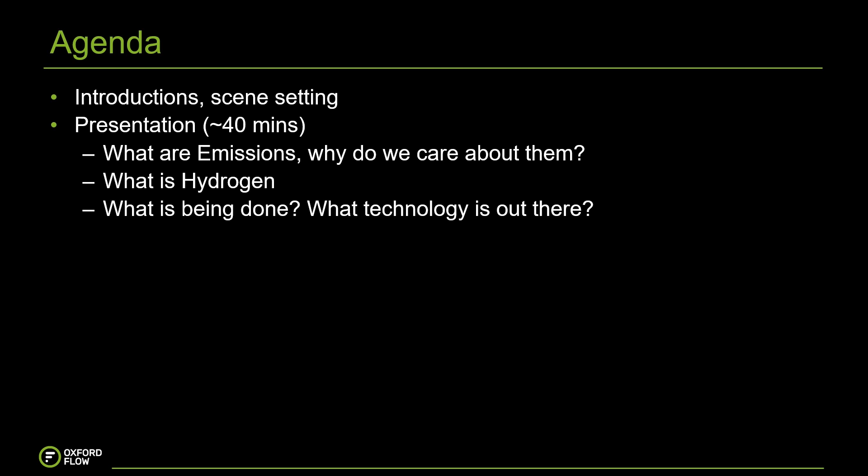So, without further ado, I'll move on. We'll start off with a few introductions. So, first of all, our hosts, who are Oxford Flow?

Oxford Flow are a manufacturer of flow control and pressure control devices, spun out of Oxford University in 2015. Since then, we have done a huge amount of work throughout the world in a lot of different industries. We started out in water distribution, sorting out a lot of problems for UK water companies.

Those of you who are based in the UK and have read the news recently know that the UK's largest water supplier, Thames Water, is running into some issues with its own debt, but I'm not going to get into that.

We started out in water, but now work in energy systems, gas transmission, energy transmission, and upstream oil and gas as well. But we are very heavily getting involved with the hydrogen side of things as well, going forward. As I say, Oxford Flow has been around since 2015.

It spun out of Oxford University. The founder of the company is this man over here, Professor Tom Povey. He came up with this revolutionary design of pressure regulator because he threw out the rule book for how you should design a pressure regulator or control valve and came up with his own design.

Now this range has extended from this first item that you see over here on the right to a rather large range of pressure and flow control devices, along with some accessories that are proven and ready for the energy transition. So we start off...

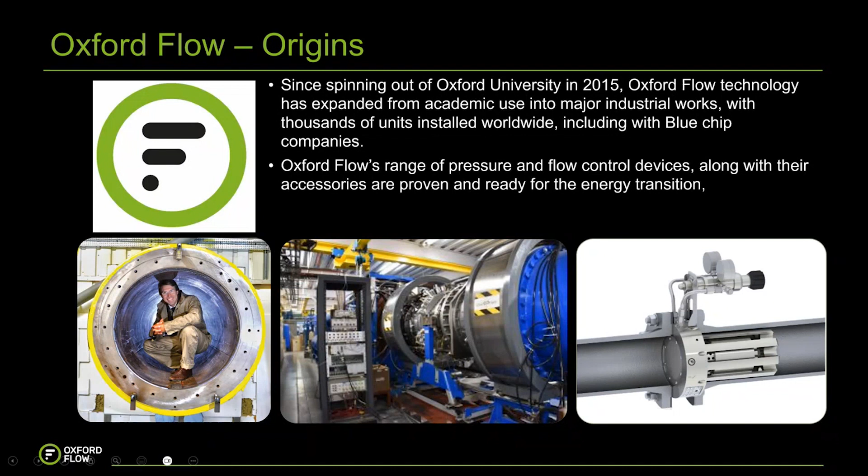...with a little bit of a product overview as well, a little bit of background to what Oxford Flow does. We've got three major product lines: the ES series axial control and isolation valves, the IM series of gas regulators, and the IP series of liquid regulators used for water, oil, or any other process fluid. All of these products have auxiliary products and variants, so I won't go too far into the details - these are all on our website, which will be shown later in the presentation.

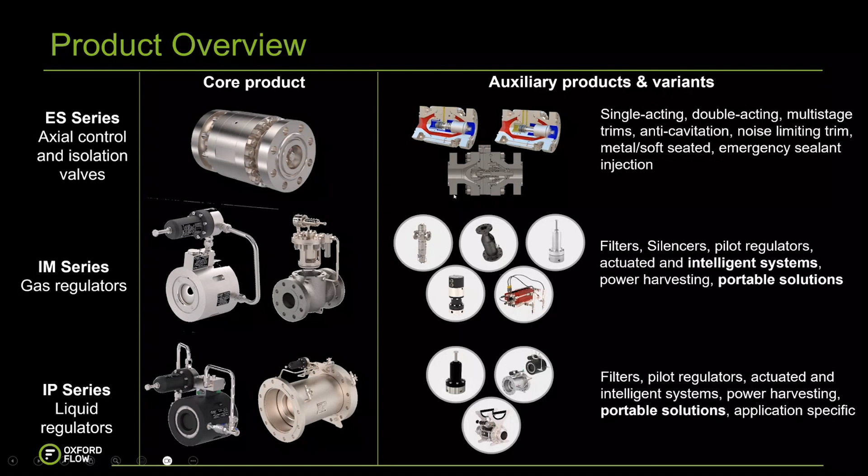So, what is going on? Why is everyone here, why is everyone tuned into this webinar today? I'll start off with a few questions and then the answers going forward. First of all, what has happened? Traditional forms of energy are running out - oil and gas reserves, fossil fuels are running out. That is a fact. There may be a lot left, but they will run out at some point. And the extraction and processing of that fuel is causing and has caused irreparable damage to the planet.

And the UK - this came out, I think, yesterday - is currently missing all of its targets, according to the Climate Change Committee. So, lots of things have to change in order for the world to carry on in a healthy and sustainable way.

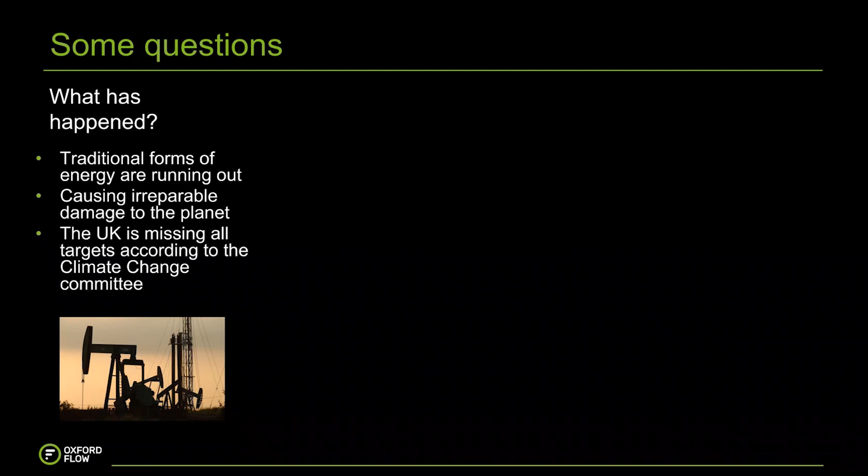So what really caused this to happen? Coming from a very innovative flow control and pressure regulation manufacturer, there really has been a lack of innovation for a very long time, a real lack of will to perform step changes in designs and operations. So that's kind of what's happened - there's yes to innovation, but no to change, and the two can't really go hand in hand.

We, as an entire planet, as an entire population, have formed a very heavy reliance on fossil fuels as well. So here we are, and we can't just stop the taps. That just can't happen for lots and lots of reasons, and no one, especially us, is saying that we should.

But there are also world events - I've shown a picture of the Russia-Ukraine war currently going on that has seriously affected energy supplies all over the world. Much more than that, but I won't get into the politics of that today.

So what does all of this mean? If nothing is done, I think it's very obvious: if we carry on the way we are, there will be serious and long-lasting consequences. But it is up to us. It's this generation that has to do something about this situation. All the change has to come from today, from now.

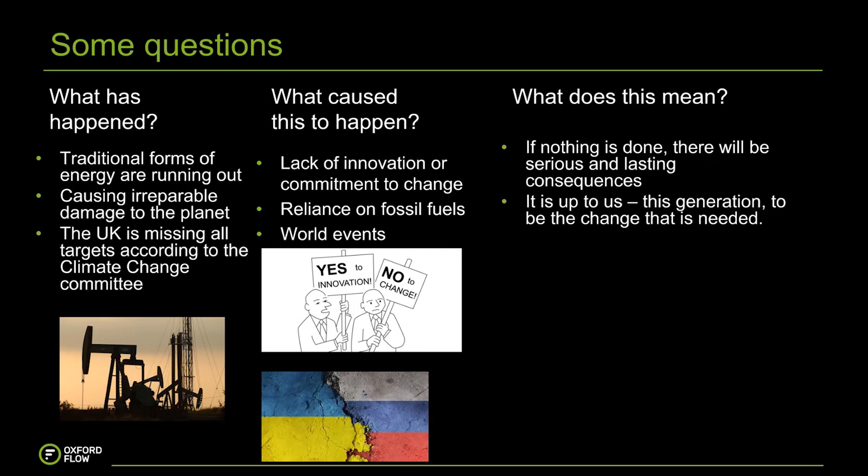So going on, what is actually being done now? I've listed some items here: emissions reduction policies, net zero policies, carbon offsetting, but more importantly, research into alternative fuels, alternative transport, shipping, food, investment. There is a huge amount of investment going into low carbon technologies and renewables, but then also just spreading the word in conferences and exhibitions.

So that's all a lot of money, and it's a lot of talk. I just had a quick Google of conferences and exhibitions around renewables and hydrogen, and you just cannot breathe for hydrogen conferences and hydrogen technology shows and renewables like that. So things are happening, but conferences and exhibitions are one thing, and going ahead with a transition is another.

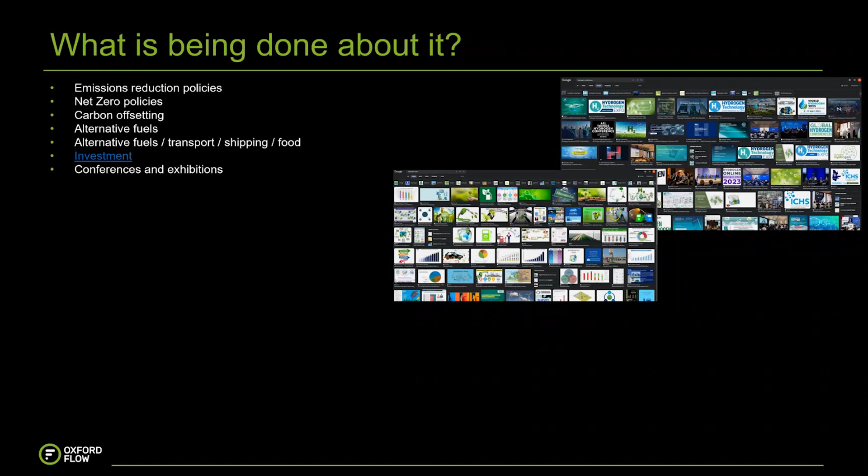But that said, I've said we can't just turn off the taps for oil and gas and fossil fuels, because they do contribute a lot to our day-to-day power and electricity.

And this is a forecast from TotalEnergies - all references will be available later on. This is showing the kind of requirements in 2050 for oil and gas, so fossil fuels. And they've not really reduced that much. In fact, they've grown as a proportion of the entire energy mix.

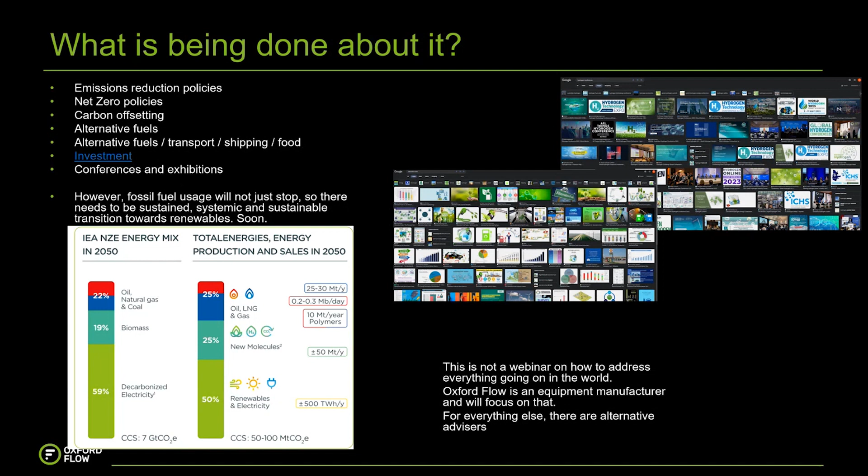Oxford Flow is an equipment manufacturer, and we will focus on the differences that Oxford Flow can make. For everything else, there are alternative advisors available. I don't have the contact details, but there we are.

So let's kind of bring this into focus now. We are focusing on emissions, hydrogen, and general renewable tech. That's not to take focus away from any one of those three. And I'll be very clear in that there is no silver bullet to any of these issues. Doing one, solving the emissions crisis will not solve the rest of the energy crisis or anything like that.

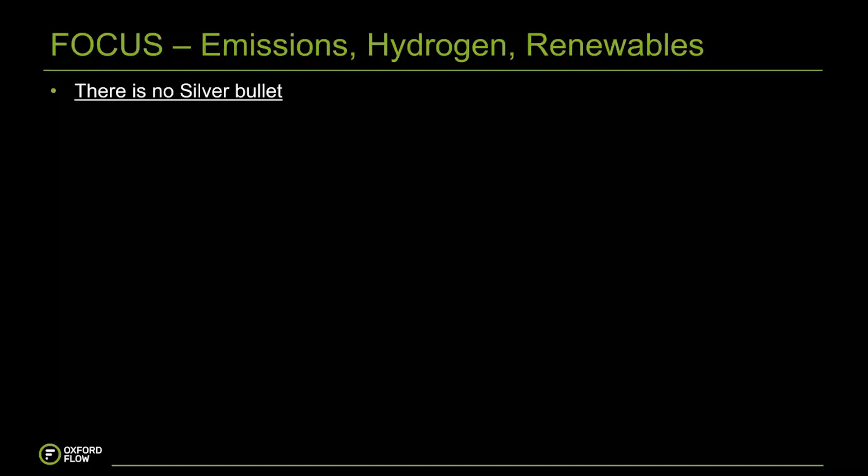However, there are solutions around, products and technologies that will make that collective effort easier through, first of all, marginal gains. Reducing emissions step by step or cutting them away entirely will make the transition away from fossil fuels over to hydrogen, to renewables, to anything else quite a lot easier.

But as I said before, it is a collective effort. Not just equipment manufacturers will have to get involved here. It is governments, it is users, it's consumers, it's other producers as well. So team effort, but it's going to take a lot of effort. But marginal gains and step changes are the little ways forward.

So we'll focus on the emissions and hydrogen and renewables, but also on the products, those solutions and where they can fit to make the systems where Oxford Flow fits in - petrochemical, energy, utility systems - where they fit into the net zero age, and how can we carry on with those? How can we make them fit for purpose going forwards?

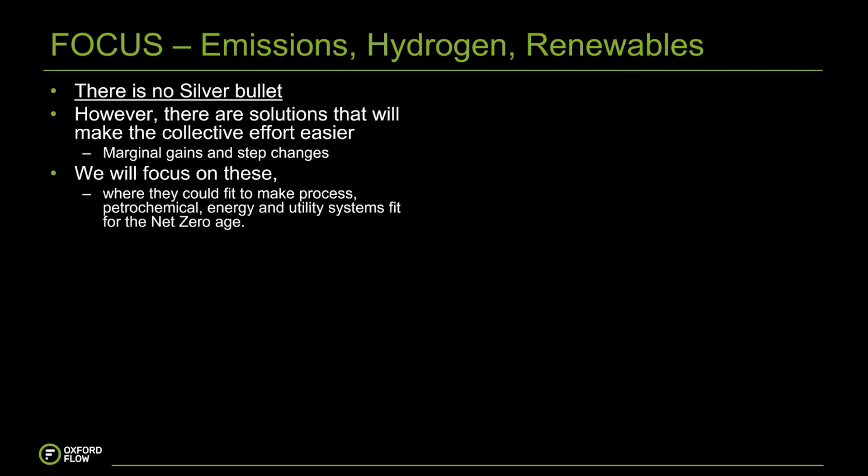So, as I say, we have a line of products that are available that we want to make sure people are aware of, because they can help with all three of these major points: emissions, hydrogen, and renewables. So we've obviously gone through the core product line, but we've also got cutaways here, just exactly what we're doing, which is so different to what anyone else is doing, especially in pressure regulation and isolation and control valves as well.

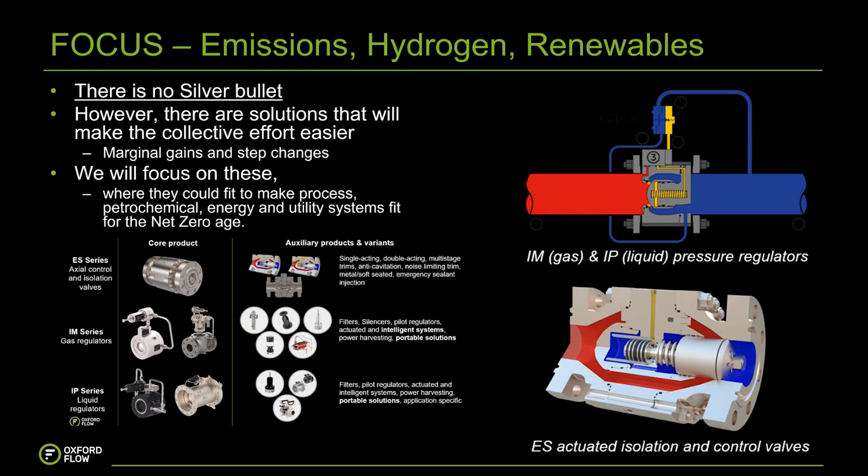So just breaking down those first 3 points, we start off with emissions. Why are emissions important? And first of all, what are emissions? I'm sure I'm preaching to the choir here. There's a lot of people who want to know the answers straight away, but there are also probably people on this call who are very new to this as well. So forgive me if I start from the beginning.

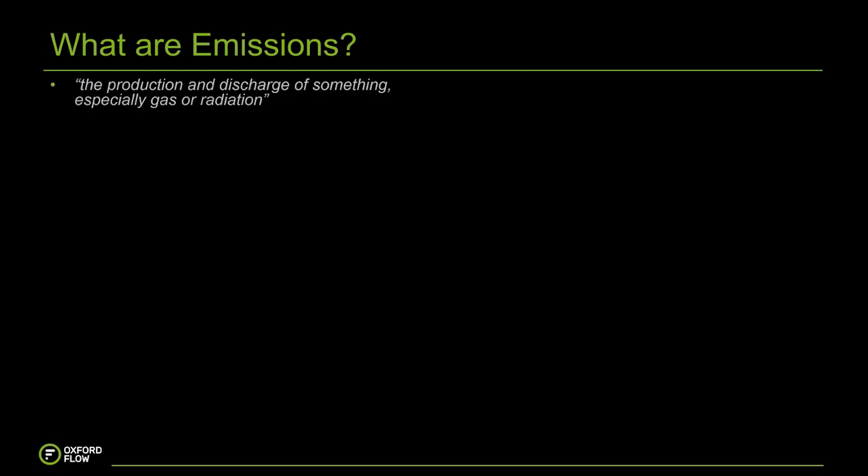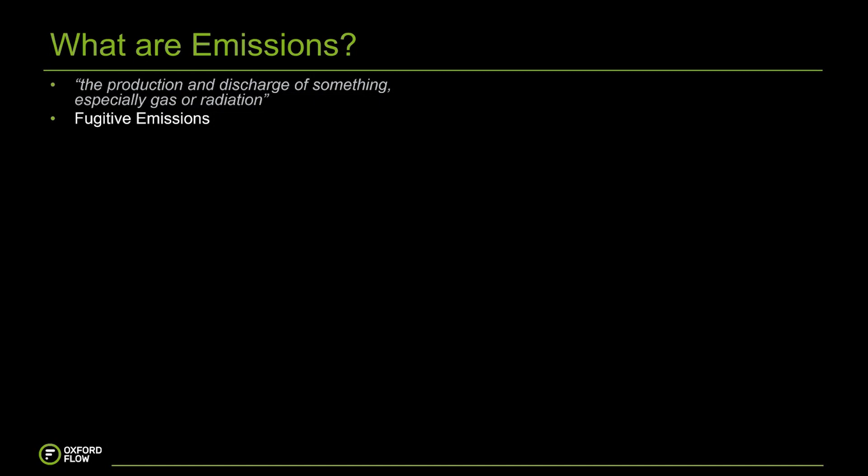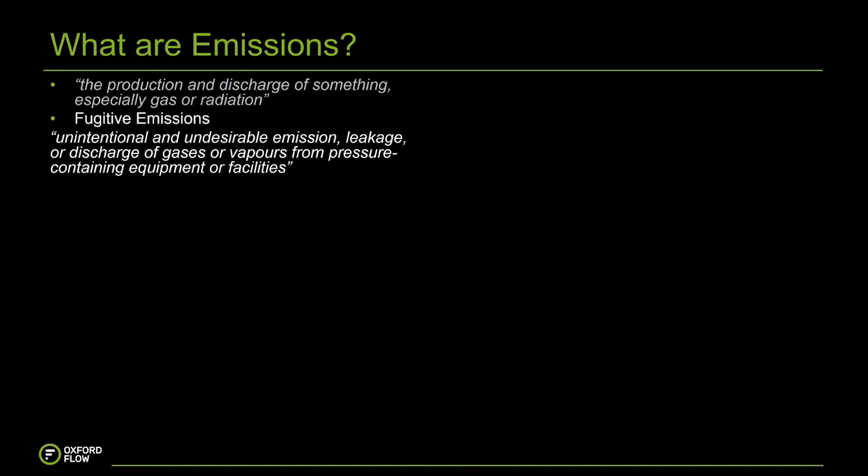So what are emissions? Production and discharge of something, especially gas or radiation. That is very broad. Specifically what we are talking about today is fugitive emissions, which has a slightly different definition. Emissions in general can be applied to anything, from cars to a leak of water out of the utility system. But fugitive emissions is very particular to process industries, defined as the unintentional and undesirable emission, leakage, or discharge of gases or vapors from pressure-containing equipment or facilities. That's very topical to what we do here at Oxford Flow, producing pressure-containing equipment that goes into process and utility facilities.

One of the main things we found the other day, this came out in April of 2023, is that the US oil and gas industry is emitting 70% more methane than the Environmental Protection Agency estimated previously. So that is a reasonably worrying estimate.

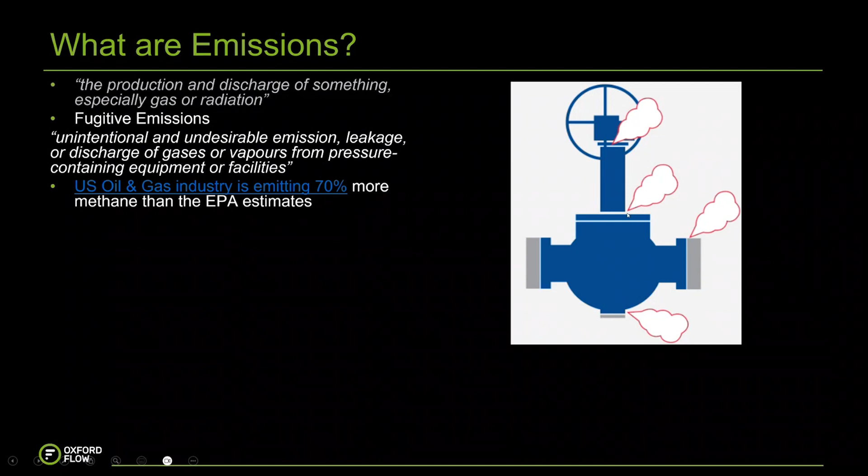I've got an image here of a standard control valve, a common or garden control valve, showing where common fugitive emissions come from. You'll notice this vertical item here, that's where there are two forms of emissions, and that comes from an Environmental Protection Agency report listing all of the pieces of equipment within a typical facility. There's a wider report linked here which you can all read yourselves, covering pumps, valves, connectors, lines, relief valves, average controlled and uncontrolled emissions in tons per year.

62% of emissions come from valves, so that is pretty telling in itself. Obviously joints are a major point as well, at 31%, and that is really telling. But of those valves, 80% of that 62% - I'll leave you to do that maths on your own - comes from the stems of the valve.

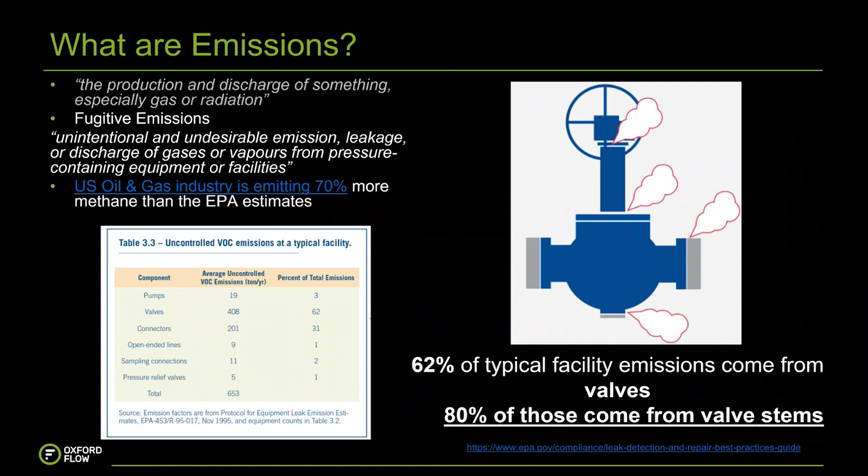So this vertical component here, which slides up and down, or radially for a ball valve or anything like that, that is where most emissions come from, which is really very telling. What does that actually lead to within these systems, within valves especially?

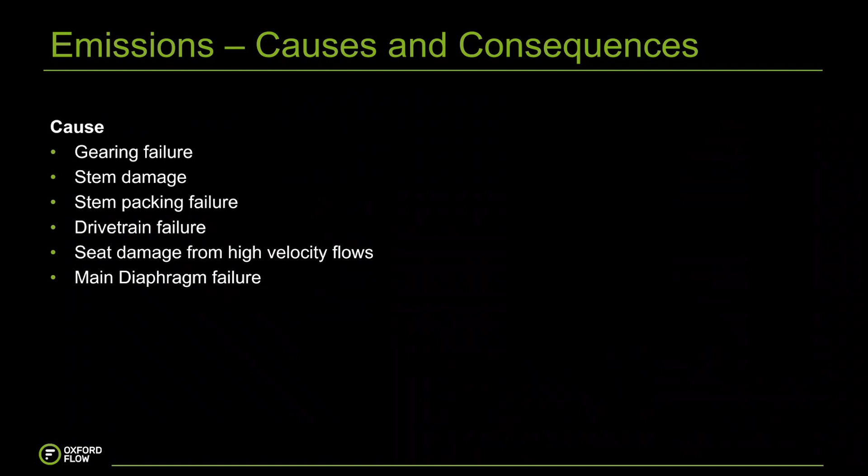So what do we do about all of this? This is a major issue because every time a valve loses control and needs maintenance, technicians have to come and maintain it. That requires the venting of a line, or a shutdown of some section to maintain the valve itself, which all requires venting of gas or fluid within the line. So how do we get around that? How do we stop the valves from failing, and as a result reduce that maintenance activity? Granted, some people have to do yearly or 6-monthly maintenance depending on the process industry or conditions, but how do we minimize that, minimize those failures, and ultimately reduce fugitive emissions?

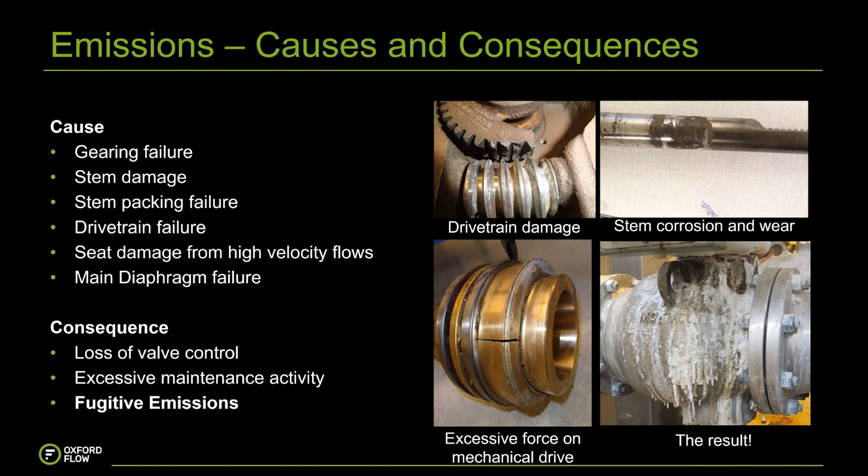The most simple and route one solution is to eliminate causes. So Oxford Flow have our own ES series axial flow control and isolation valve. This is an isolation control valve that is emissions free by design. Going back to that EPA report saying 80% of the leaks that come from valves come from the valve stem, the way to get rid of those 80% of leaks is to remove the stem entirely, and that's what we've done here. We've removed any sort of dynamic seal interface to atmosphere.

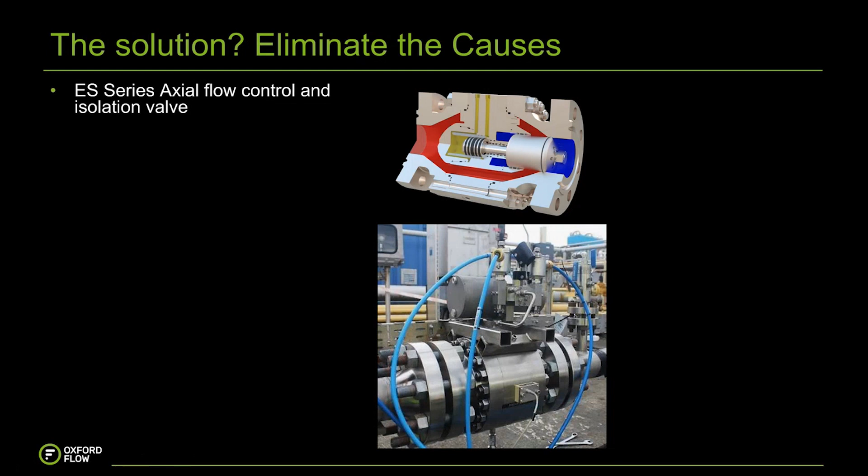There's no stem, it's just hydraulic lines. We've essentially moved that stem into the valve itself, where there is very little chance of process fluid leaking to atmosphere or hydraulic fluid leaking into the process fluid.

We also have our IM range of gas pressure regulators. These are commonly used in gas transmission and distribution purposes, but also lots of different process industries, tank blanketing, and also hydrogen as well, which I'll come on to later.

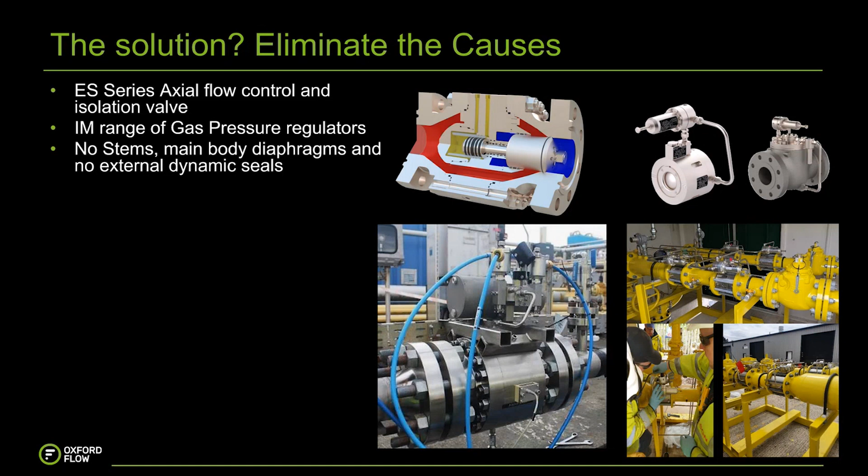The main point of all of these products is that the whole assemblies have no stems, no main body diaphragms, and therefore no external dynamic seals, which is very important. It's what differentiates us from almost everyone else on the market.

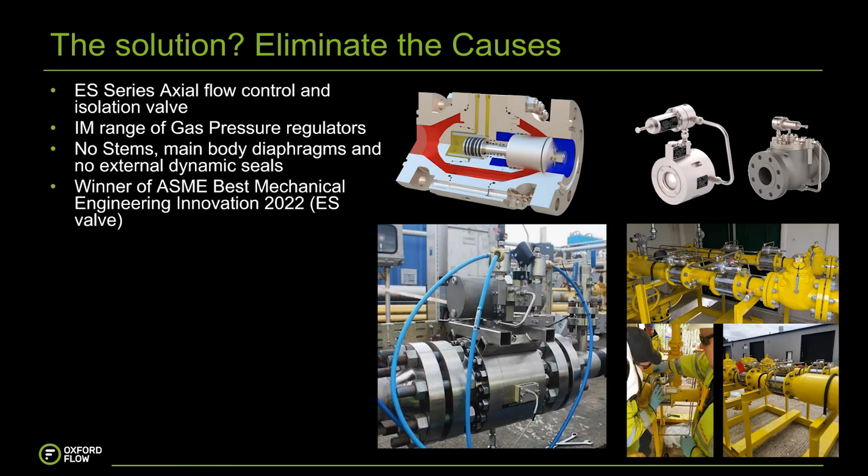I will say as well that the ES valve in 2022 was the winner of the ASME Best Mechanical Engineering Innovation Award at OTC last year. That is a really powerful award, because the reason this valve won was because of the inherent emissions reduction in this valve design, which is a game changer.

So we've talked about this. Actually, it's quite a simple thing for a lot of people to fix - just use emissions-free equipment. These aren't just designs, they have been installed, they have been working, and they have been shown according to the ISO fugitive emissions 15848 standard for control valves, that especially the ES valve, is emissions-free by design.

That has been tested as such. It's achieved the highest rating possible by a very high margin when tested with helium, which is the smallest molecule, the smallest element that anyone can test with, because even though hydrogen is H1, one single proton, it always exists as H2, which means its molecule size is slightly larger. So testing with helium and proving that we are the most resistant and emissions-free for that control valve is incredibly powerful.

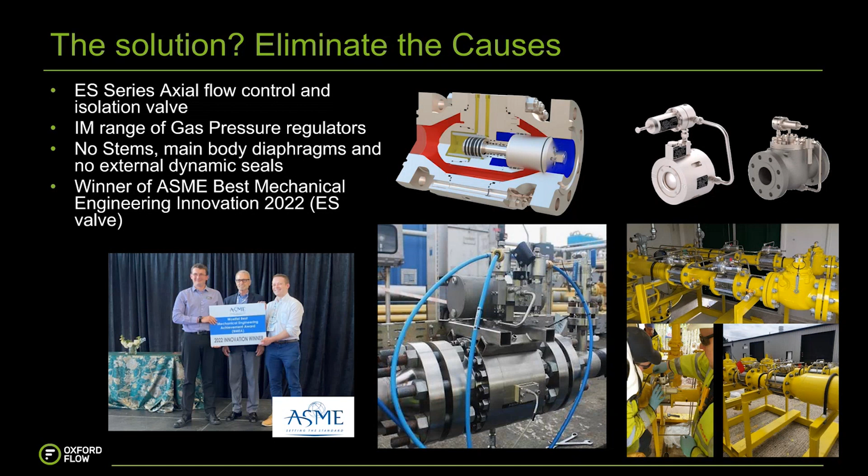But let's talk about hydrogen. I'm sure a lot of you are very familiar with hydrogen, but for the benefit of those who aren't and have just joined this webinar, I'll give you a very brief overview of hydrogen as a fuel, as an element, and why it is relevant today.

The reason everyone is talking about hydrogen is that it is a clean alternative to methane, natural gas. Hydrogen has been talked about as a fuel for a very long time, and it has been around as a feedstock, fuel, and chemical in process and paint production in many other industries for many years. But only recently has it been thought of as a clean fuel for the rest of the world to use - residences, commercial housing, industrial consumers.

This is the time that now hydrogen is being looked at, because it is estimated to contribute 75% of the mass of the universe. It is one of the most abundant elements that there is.

Also, burning hydrogen produces no carbon dioxide. Burning natural gas, oil, other fossil fuels, petrol, diesel, all release carbon dioxide and other nasty emissions. So releasing those into the atmosphere isn't the greatest thing, but hydrogen, when you burn it, releases no carbon dioxide - it's a clean burning fuel. Even releasing hydrogen into the atmosphere itself has no greenhouse effect, so if you do have leaks, it's not going to contribute very heavily towards global temperature rises and climate change, so far as we know anyway, as far as I know.

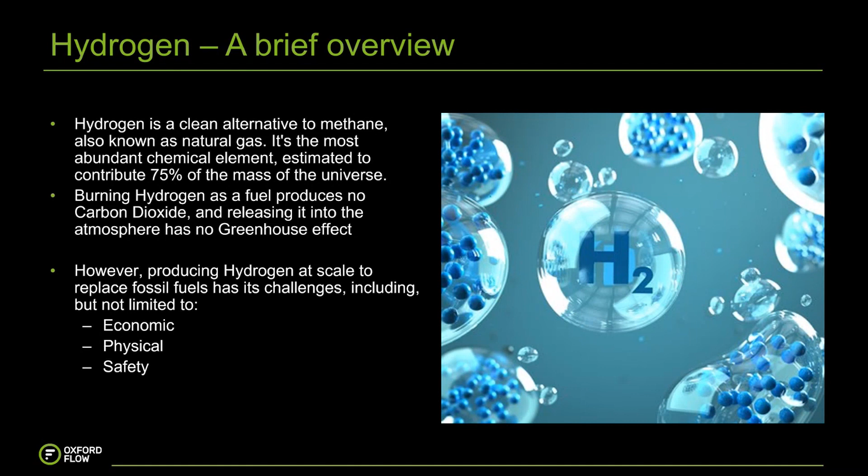So I'll come on to those slightly later on, but I'll just remind everyone that it is still Pride Month for another couple of days or until tomorrow. So I thought it may be quite an interesting one to take you through the hydrogen rainbow.

So to give you some background into this, hydrogen production is changed, and the type of hydrogen, how it's produced, is divided into different colours. Actually, a lot of them don't correspond with the actual colours of the rainbow, but it's called the hydrogen rainbow because there are so many colours available. But I'll start off with what is currently the most abundant form of hydrogen that's produced.

So this is grey hydrogen. That's produced from fossil fuels, from steam methane reformation, SMR. So that does have a carbon footprint associated with that. It releases carbon dioxide into the atmosphere, and it's generally, as of last year, contributed to 95% of hydrogen production. So not exactly moving the transition on, but it's a stepping stone.

The ideal, where everyone wants to be with their hydrogen production, is green. That is electrolysis using large-scale electrolyzers powered by clean energy, so solar panels or solar power or wind energy. So those renewable energy sources power the electrolyzers, which essentially crack water into hydrogen and oxygen. And the hydrogen is pumped into whichever lines or storage or tube trailers. That's the way it goes. But green hydrogen is the ideal.

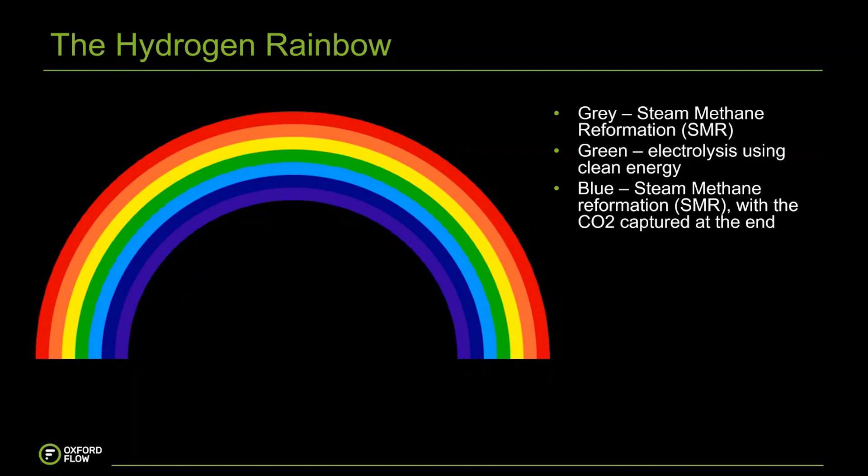The next one, which is even worse than grey, is black and brown, which is essentially coal production of hydrogen, which we want to stay away from. It's damaging to the environment, so that's ideally what we don't want to do at all.

There's also pink hydrogen, which is similar to the green form. It's still using an electrolyzer to crack water into hydrogen and oxygen, but instead of renewable clean energies from solar, wind, or tidal, it comes from nuclear power. Lots of nuclear power stations are being commissioned, so that's a wide and ready form of energy, and it's going to play a massive part in the energy mix going forward.

And then quite a new one is turquoise hydrogen, which is methane pyrolysis. I won't go through this in much detail because I only found out about it not too long ago, so I'm still trying to get my head around how it works, but it's a reasonably new one.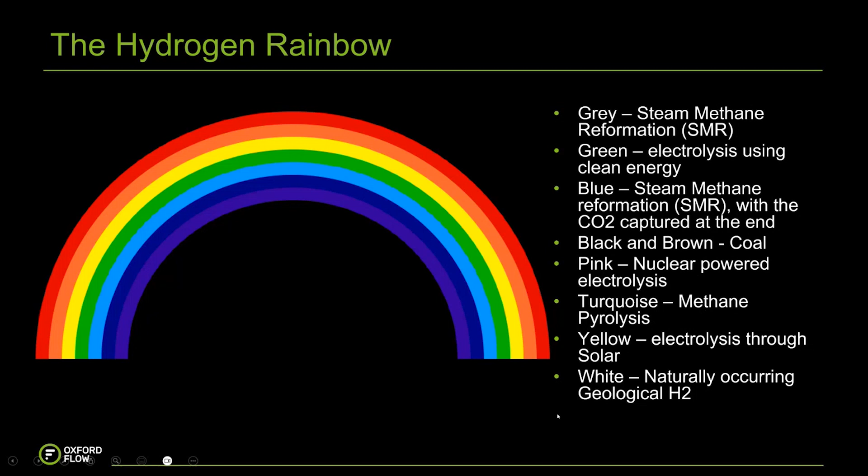Yellow hydrogen is produced through solar power, very specifically through solar power. And then white, which again I only learned about reasonably recently, is naturally occurring geological H2. It exists in rock formations as it is right now. There aren't massive reserves of this, and you would have to get into it via fracking or similar methods, which I won't get into the politics of right now. So that's an overview of the hydrogen rainbow of various different colours. It's very possible that going forward there will be a multitude more of these colours associated with hydrogen production, but I'm not going to try and present them now.

So we'll come on to hydrogen emissions, revisited. I mentioned before that hydrogen is actually one of the hardest chemicals to store and transport at scale. As I said before, hydrogen has been around for a very long time as a feedstock, as a fuel, as an industrial fuel.

But transporting it and storing it at the industrial scales we're going to need will have its challenges. It's particularly difficult on pressure reducing equipment and pipeline technology, especially at large bore pipelines above kind of 2, 4, or 6 inch - that's DN 50, 100, and 150. Above those sizes, it will present huge issues.

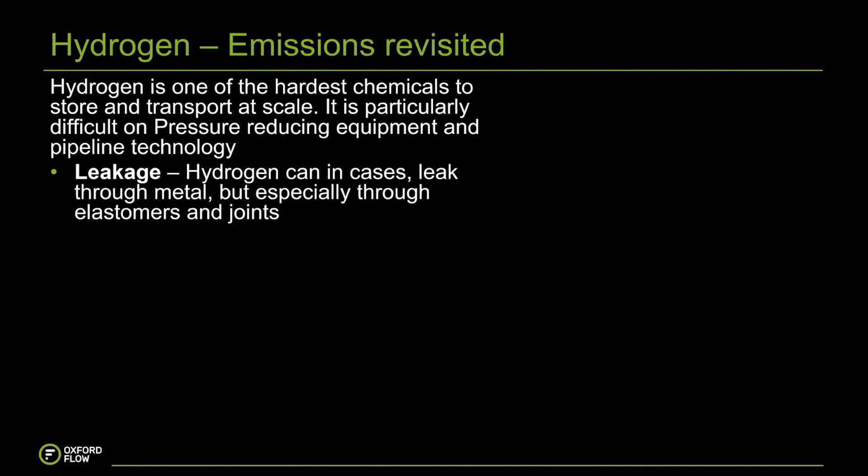So leakage, i.e. emissions - I've mentioned before hydrogen can in cases leak through metal itself. But anywhere there's a joint or an elastomer, that can struggle with hydrogen as a seal. Lots of elastomer and sealing OEMs have gone through huge testing and R&D processes to try and sort out sealing with hydrogen, from up to 1,000 bar of pressure all the way down to millibar outlet pressures. Hydrogen is an issue at every stage, so using equipment with hydrogen-resistant elastomers and metallurgy will really help.

One of the other issues is a phenomenon called embrittlement. Anywhere there's a ferritic steel - a steel pipeline or steel components - embrittlement can occur. That's where hydrogen essentially seeps into the crystalline structure of the steel, reacts with carbon within those structures, and creates methane. That production of methane within the steel walls can lead to stress cracking and eventually failure in the pressure containing components. So the choice of material you use for these difficult conditions really does make a difference.

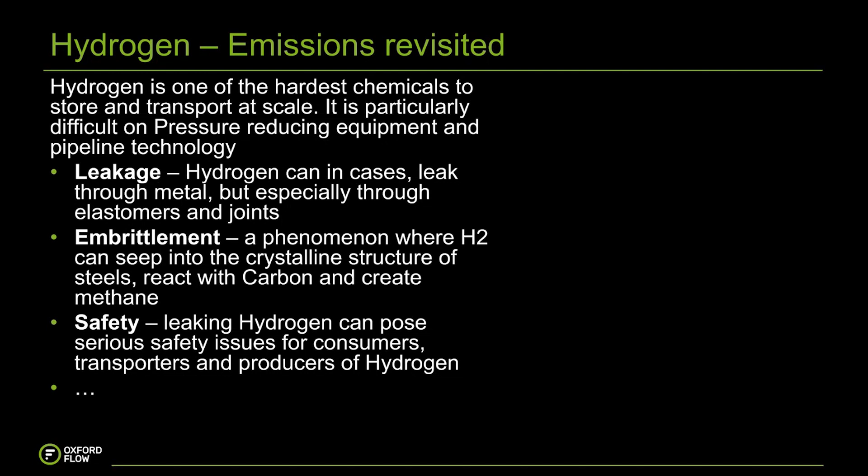And obviously all of that leads to safety implications. Leaking hydrogen can pose serious safety issues for consumers, transporters, producers, anyone who works on a hydrogen pipeline. As I said, this is not an exhaustive list - there are plenty more coming, and plenty more being researched and fixed as we speak. But this is one of the results that come if we don't sort out leakage. Instead of natural gas, which is reasonably easy to vent off or divert away from a production site, hydrogen is aggressively buoyant and will ignite at any point. It's very ignitable, as opposed to natural gas, which only poses a danger in certain very low concentrations.

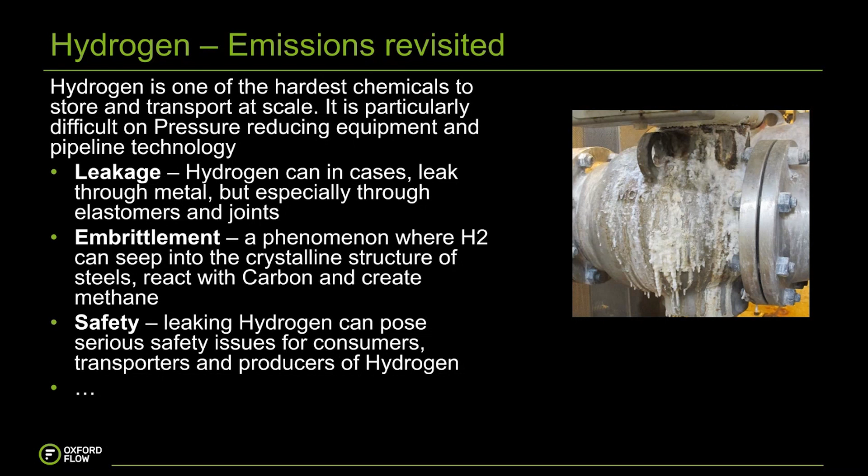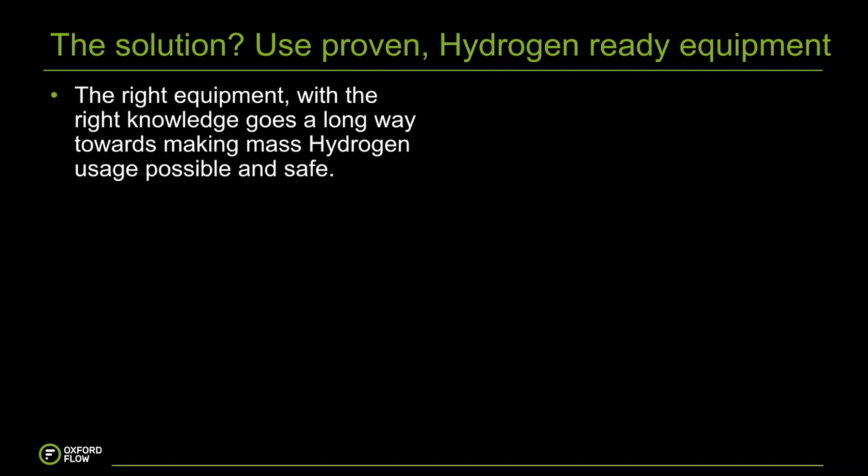So the solution - you can probably see where I'm going here as a manufacturer of pressure containing and pressure control equipment - is just use hydrogen-ready equipment. The right equipment with the right knowledge does and will go a long way towards making hydrogen usage en masse usable, possible, and safe. That would be through our own technology. Obviously there are other manufacturers out there who've been doing this for a very long time, but Oxford Flow have been doing this with innovative ways of working, basically rewriting the rule book in how to design pressure and flow control equipment for these kinds of industries. And it just so happens that we are perfectly placed to help out with hydrogen projects going forward. I'll come onto a few details of those in the next few slides.

But much more needs to be done. We are one manufacturer and we can't change the course of history by ourselves. Governments, international standardization, that's all required to make sure that the entire world moves forward so we can address these challenges together and with a unified direction, because without that, progress will be quite slow.

If everyone is trying to do their own thing to make their own equipment hydrogen ready in their own way, or thinking that the industry is going to go one way and then it goes another, that just stalls progress. So research, testing, verification, all of the knowledge that's being built up needs to be performed and shared. There is no point in everyone performing all of this research and not sharing it with the world so that we can all, as a collective, move forward and solve the crises that are coming if we don't change our ways.

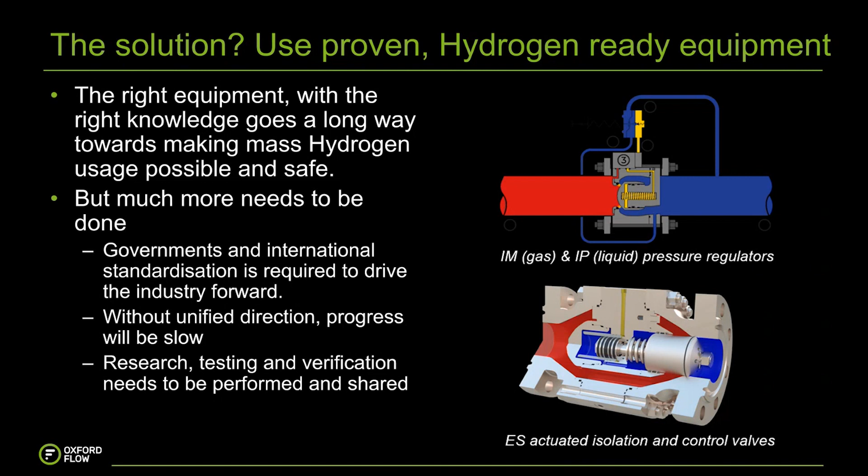So on that, a bit of shameless marketing here - Oxford Flow as a company has a lot of hydrogen initiatives going on. We have independently completed extended hydrogen and helium testing to make sure we are ready for whenever that transition comes, whether it starts with 20% mixes into natural gas, but then all the way up to 100%. That is something we are prepared for. So all of our equipment has gone through an extended range of hydrogen and helium testing with external test houses.

We've also partnered with the LTS Futures Committee, the LTS Futures team within SGN, who have selected our equipment and control valves for their 100% hydrogen verification of the UK high pressure gas networks. The aim of it is to repurpose all of the existing natural gas pipelines over towards hydrogen. We've been very specifically selected to help with that, because we have fugitive emissions-free technology, and it's hydrogen ready from its construction, from its metallurgy. It's all 316 stainless steel, and all of its elastomers have gone through automotive standard testing for hydrogen rapid gas decompression.